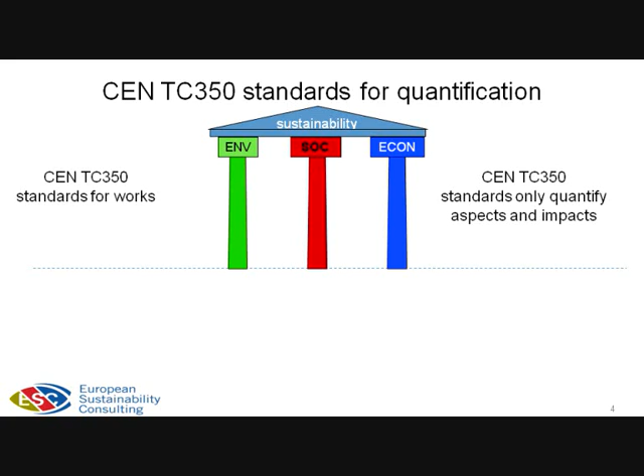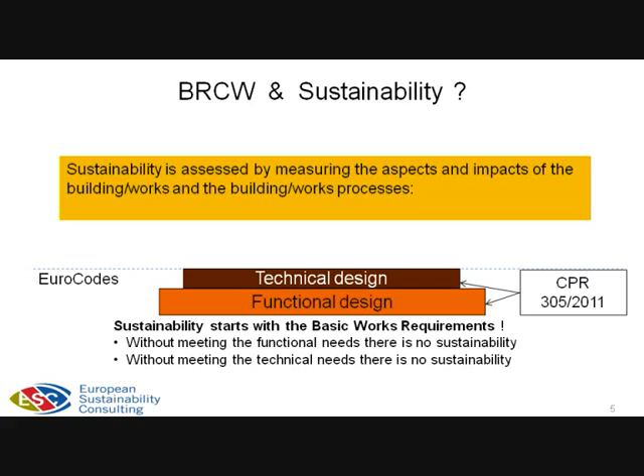But first this: if a building does not meet the needs for use, then the building and all products and materials in the building envelope and inside the building cannot be sustainable. Sustainability has to start with fulfilling the basic work requirements. The European Construction Product Regulation 305/2011 defines 7 basic work requirements.

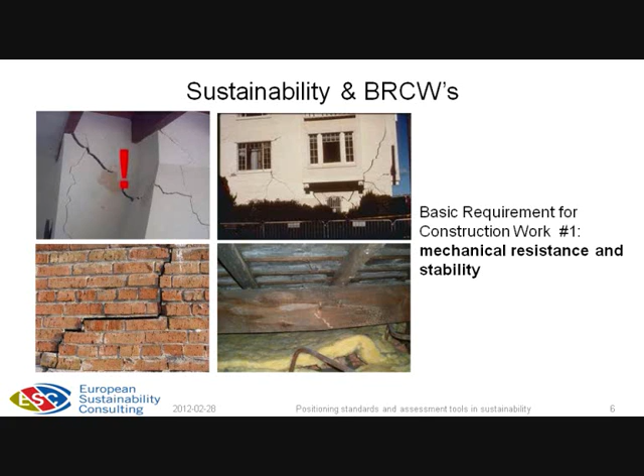If, for example, the first basic work requirement, mechanical resistance and stability, is not fulfilled, the building collapses or deformations hinder the functioning of the activities in the building. And then all products used in the building construction and inside the building interior simply are not given time to prove their sustainability.

If the building or part of the building, for example, catches fire because basic work requirement number 2, safety in case of fire, is not fulfilled, all sustainability efforts made for the building and with the products become worthless.

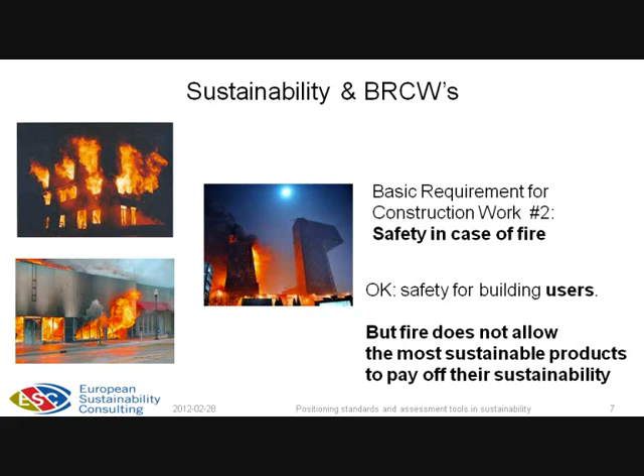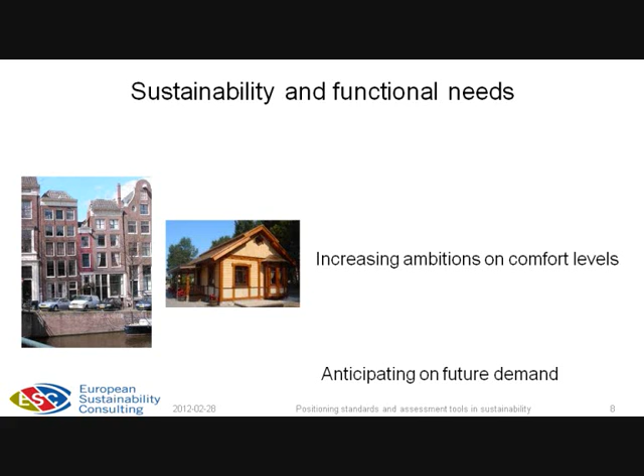So, sustainability starts with the basic work requirements, with a good functional and technical design and good construction. But once the functional and technical design is made and realized, this has an impact on the environment, on the society and on our economics.

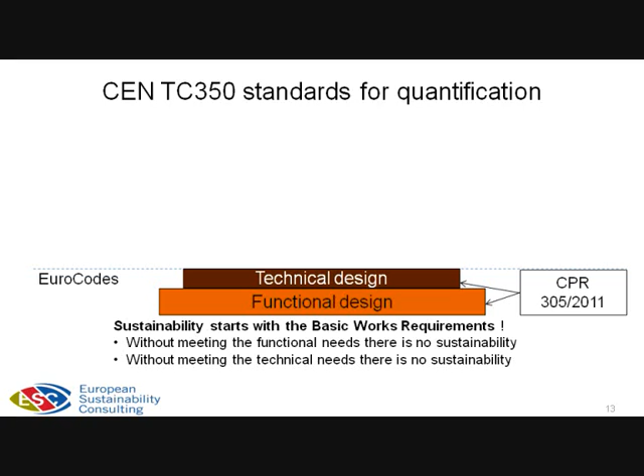Sustainability is based on the solutions for meeting the functional and technical needs, and it is measured in 3 dimensions: environmental performance, social performance and economic performance, the 3 columns of this Greek temple. The CEN TC350 standards allow measuring on these 3 dimensions of sustainability.

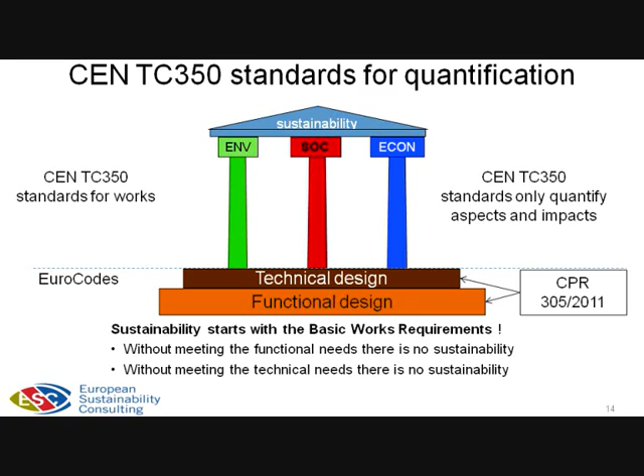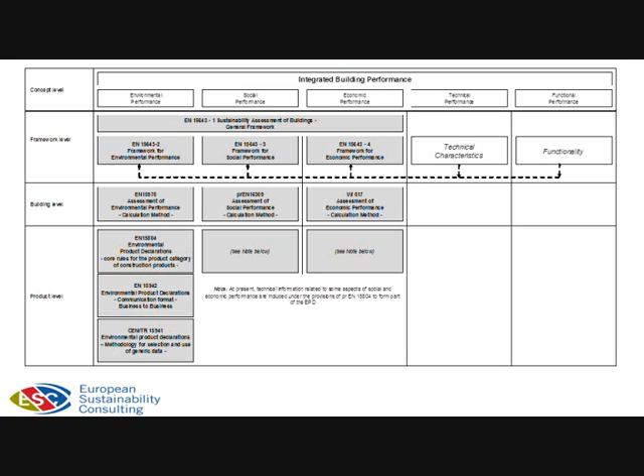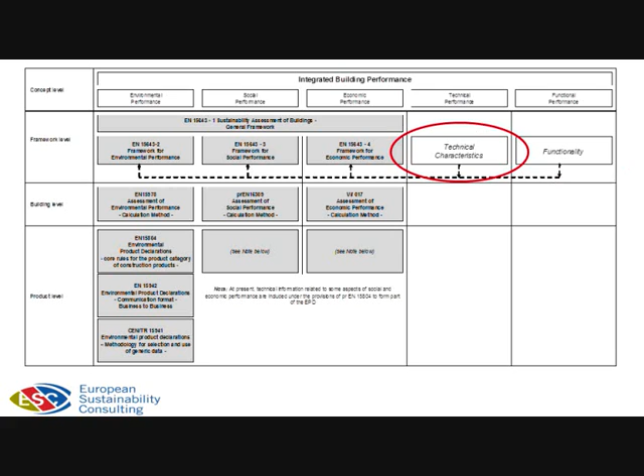The functional performance and the consequences of the technical solutions can be measured on these 3 categories of aspects. See also CEN TC350 video number 4 for more information on the positioning of the building assessment and other sustainability assessments.